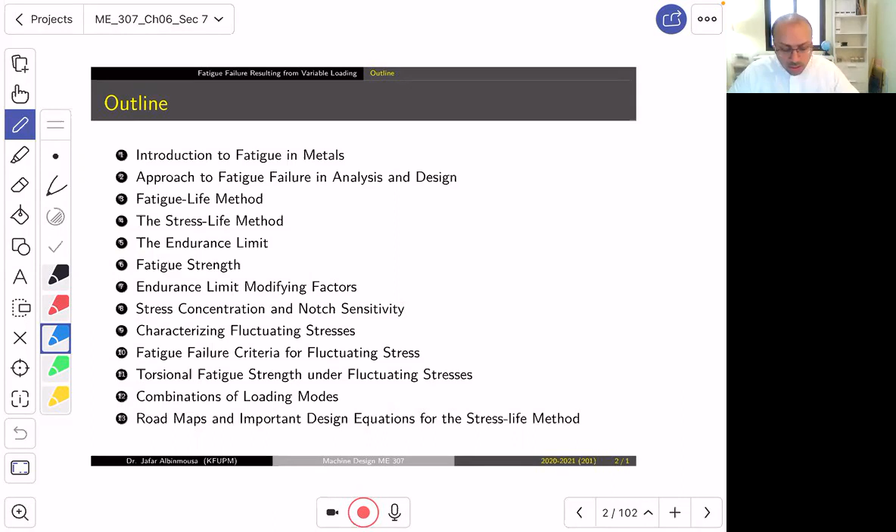So we'll talk about the introduction to fatigue, then approaches to fatigue, then the fatigue life methods: stress life, endurance limit, fatigue strength, endurance limit modifying factors — a very long list, but hopefully it will become clearer as we move further, inshallah.

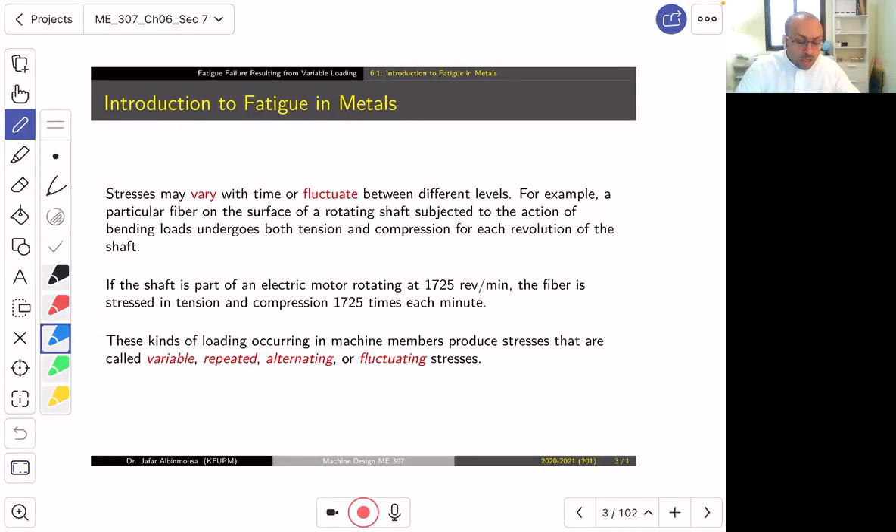Ya shabab, the fluctuation of stresses, the variation of stresses or loads with respect to time, we always tend to make it easy for ourselves and represent it by a sinusoidal wave, meaning the force is changing with respect to time. But in reality, it may hardly follow a sinusoidal wave.

What we understand is that today, ya shabab, with the Arduino age, you can easily connect a sensor to your computer. If that sensor can detect the magnitude of, let's say, displacement or something, and you stick it to your car's suspension arm or any other place, then drive your car, you will just get something like this.

What is this doing, ya shabab? Very simple. If we take the string for the cloth, which is famously metal here in Saudi Arabia, and you cut it from this piece to this, you end up having this nice straight piece. You give it to anybody, even a kid, and tell him, break it. The word break it indicates that you want to have this broken into two pieces. That's what break it means.

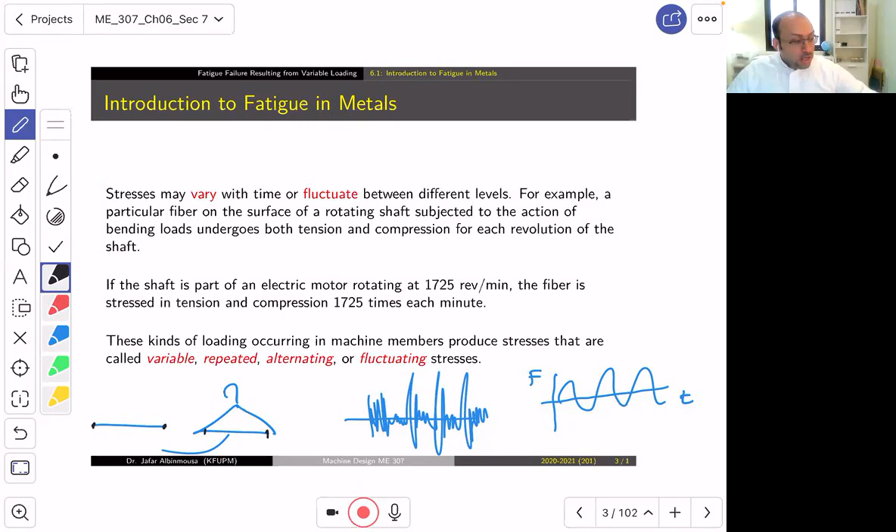So people will try to bend it. They will see that, oh my God, I can't do anything to this. And then probably the tendency, something we develop as humans, is that we will tend to move around until we determine there is a weak point in the lateral direction. But when you bend it, it doesn't break into two halves. So naturally, you will try to bend it back and forth, back and forth. If you do this at home, if you never did it, you have to be very careful, because back and forth will make the middle joint, which is now being bent back and forth, very, very hot, especially if you continue doing this a lot. Now, at a point of time, it will break.

The failure, because you were bending it up and down, is called fatigue failure. The word fatigue came to distinguish it from other types of failure.

Is there any other type of failure? Of course. You can take the same string and hang it on a machine, and then tell the machine, move apart 100 meters per second. And then in a flash, you will hear a sound, tap, and then it's broken. That's called impact. It's a dynamic load. It's too fast, too fast. And of course, there is the quasi-static or static loading, where we take the string and apply load gradually until it breaks. That's a static loading. There is also creep failure, and so on.

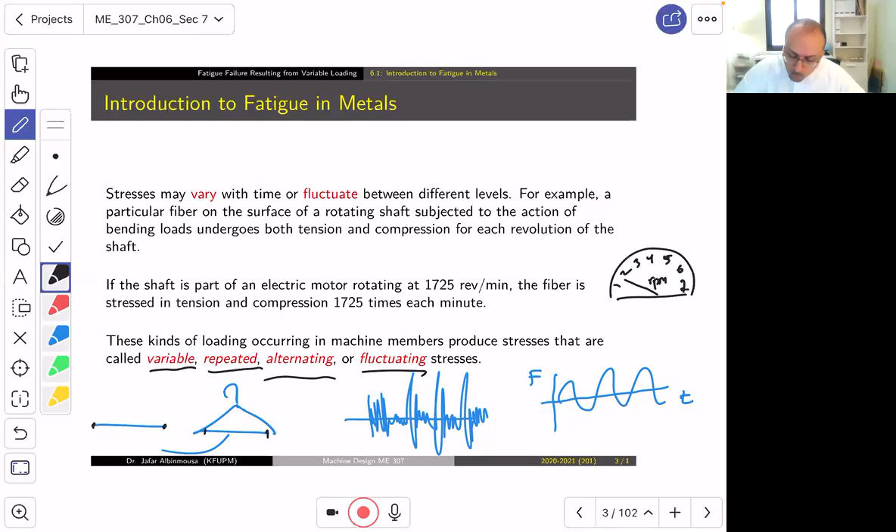But just to give you an example, the speedometer, ya shabab, in your car, you have one which measures the speed and the other one which measures the RPM. The one which measures the RPM is the interesting one. The one which measures speed is the boring one, it's very boring, 100, 200, whatever. But this one is measured in RPM. If you keep your eyes on it and think about it for 1 second, when you are at 4 or 5, it means that the crankshaft in the car, where this reciprocating motion of the pistons inside the engine chamber blow and move up and down and do all the motion, is doing this 4,000 times per minute. That's 4,000. 7 means 7,000, which means this guy is rotating several thousand times in a minute.

And you go to your friend or someone who has a car they bought like 20 years ago, and you ask them, did this fail? Did this crank fail? Because by now they've probably burned through several, maybe 100 million cycles. Is that possible? While the clothes hanger, maybe 70, 60 cycles and it's over.

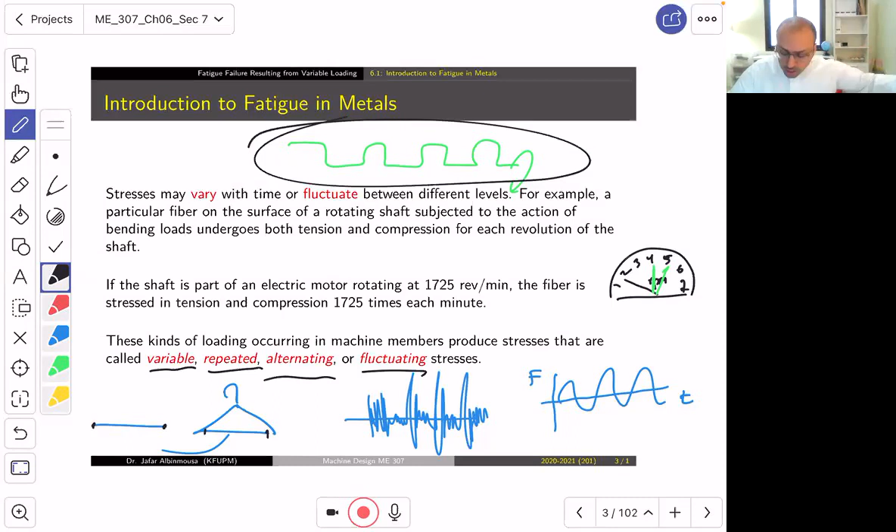And why don't they heat up? The clothes hanger, be careful, it can burn you, and it will burn you really, really hard, because its temperature reaches a very, very high range. We will talk about all of this later. These are just questions to stimulate your thinking.

Now, so machines, we are mechanical engineers. Now, maybe when we did CE203, ya shabab, and when we did all of what we did before in chapters 3, 4, and 5, it looks like we are dealing with static failure, okay? But we are mechanical engineers. We make machines, and most of our machines move. Once they move, there is cycling.

Do you know, shabab, the fact that you eat induces cyclic loading on your teeth. The fact that you walk, a human being can have around several, maybe 2-something million cycles a year, I don't remember the exact numbers, I can bring them up for you. Cyclic loading is everywhere. Because your heart is beating, there is cyclic loading. Everywhere there is cyclic loading. So fatigue is very important, especially for us.

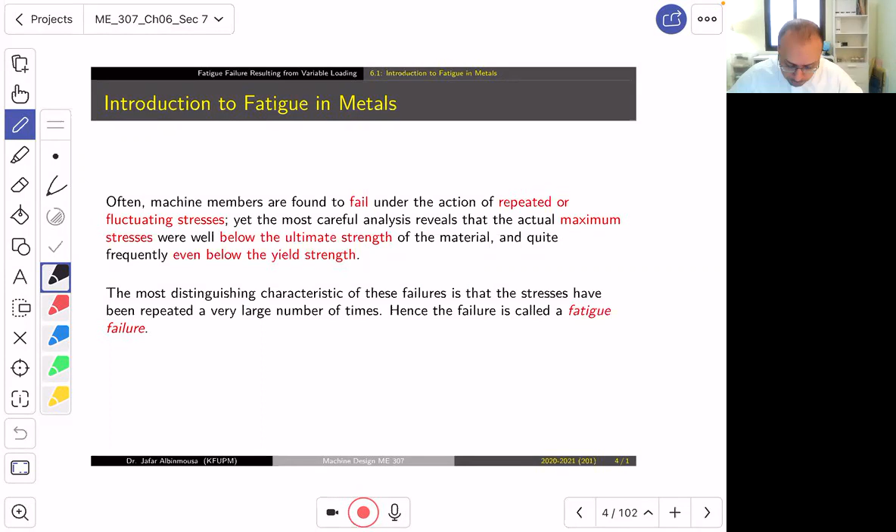So what happened? The problem is this. I want you to look down at your screen and look at this one. This is the problem. The problem is that fatigue gives you no warning.

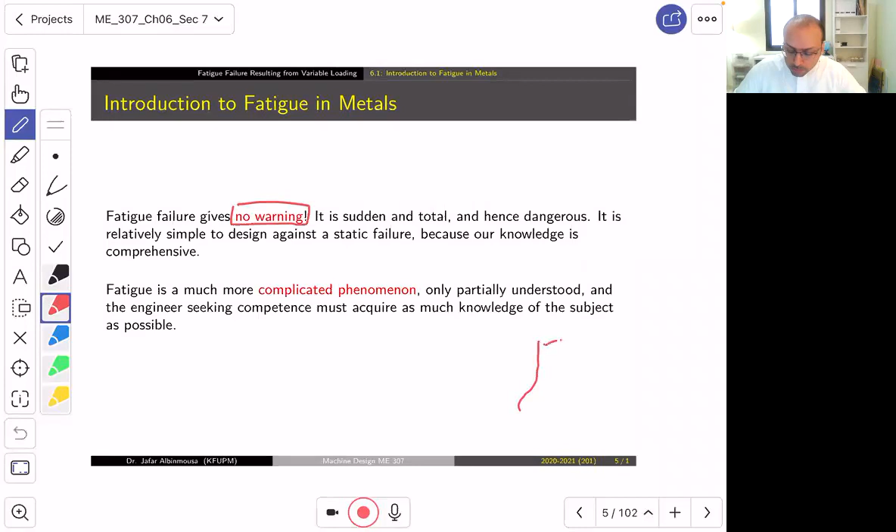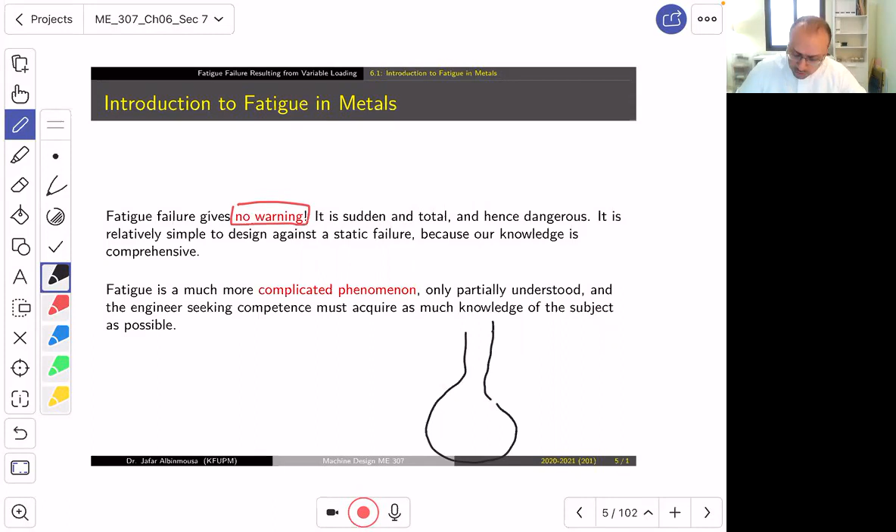So if we think about a connecting rod like this—or actually let me show you, I was planning to plot something else. The connecting rod usually has a circle and a wheel-like shape. So what happened is that usually there's a very little tiny point.

This tiny point could be due to a micro defect or a little tiny porosity. And then what happened around the porosity? The stress will be high, and maybe the stress at this point will reach above yielding, although the stress at all other points is elastic. But at that point, because of the stress concentration, it might be micro or even nanoplasticity.

That little thing will start growing a crack that nobody can see. Maybe you need a scanning electron microscope to see it. But over 15 years, your dad was just growing that crack like a baby, feeding it every day, cycles after cycles after cycles.

And the interesting thing about fatigue, guys, is that the crack will just grow like this—no ductile behavior, nothing, no signs, no necking, no chips, nothing. I mean, if you look at the rod, you may not even be able to see the crack. Maybe if you're very strong and you bend it, you can see it opening up, but because the entire material is elastic, it will close it.

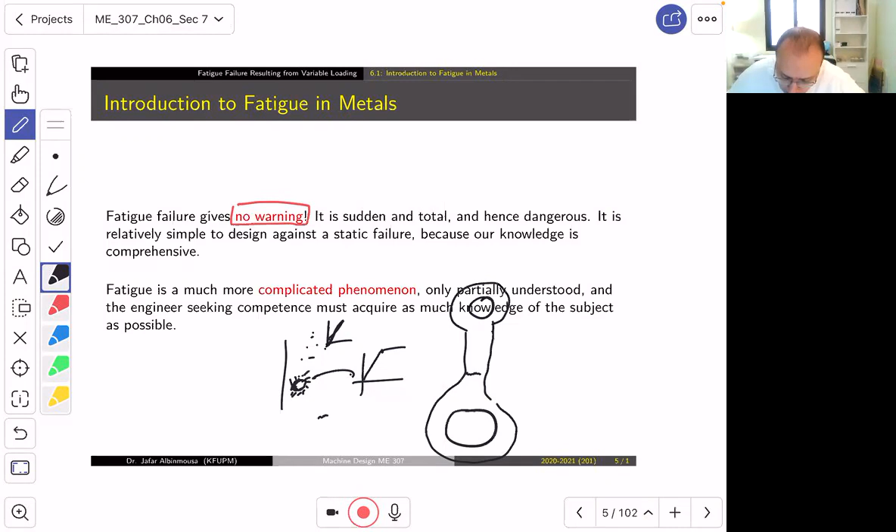So then what happened? There was only a little tiny bit left, and you finished it. Because you are rough? No, probably. But your roughness just killed the last year or so—you accelerated it. Maybe your father would have had one extra year, and you came along and reduced it to a month. Maybe. But he was doing the entire work—he spent 15 years, millions of cycles, growing that crack.

Of course, this is not to say that your father is guilty. What I'm saying is that the machine always has defects, and this is why the crack was going to grow no matter what. This is why some cars ultimately fail and others don't—maybe they are really designed well to survive a trillion or a billion cycles, I don't know, and this is way beyond the lifetime of a human being. That's the reason it's sudden and total, and very dangerous.

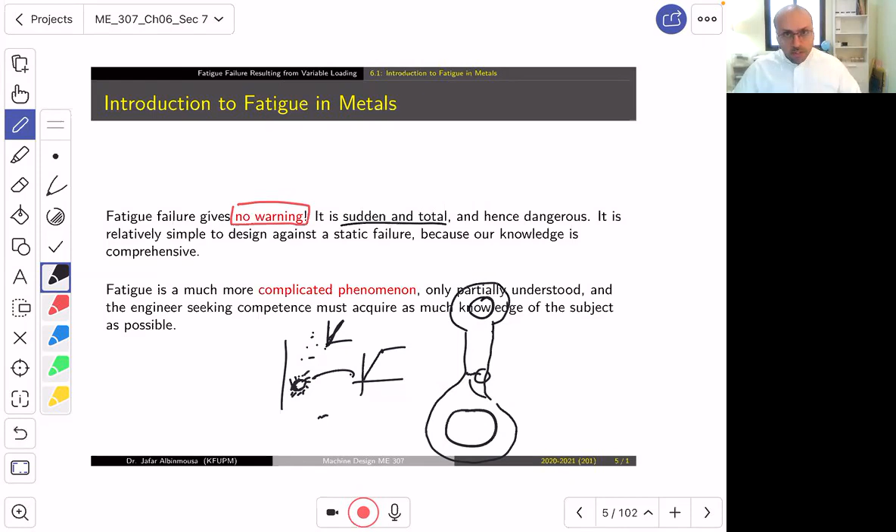It fails just like that, and it's very complex. Why? Because the material is ductile, it's steel, but it fails like it's brittle. Very strange—you see a crack growing.

Let me show you, I think I have some pictures. Let me try to show them to you. No, I don't—that's very strange. Maybe I'll show them to you later. But what happened is that a ductile material failed like a brittle material. It's just very strange. So what happened?

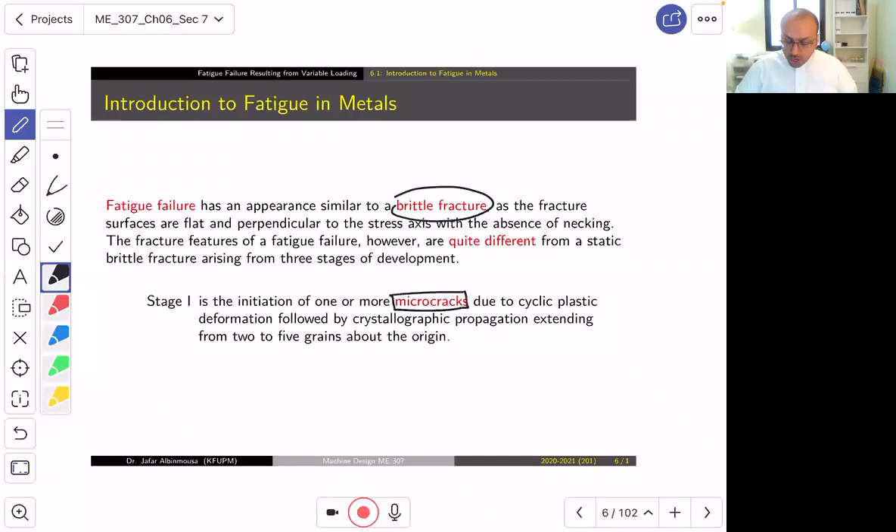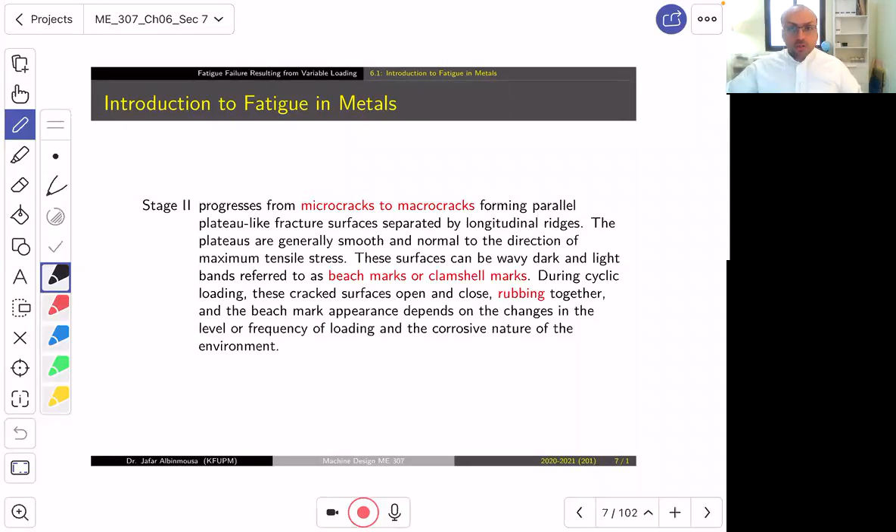Usually fatigue has multiple stages. The first one we call the micro crack stage, where cracks start from a very tiny dislocation, microvoid, or discontinuity. This micro crack then grows into a macro crack. Now the last stage, the final one, is where fatigue has eaten up 70% of the cross section—the cross section is basically gone, nothing left.

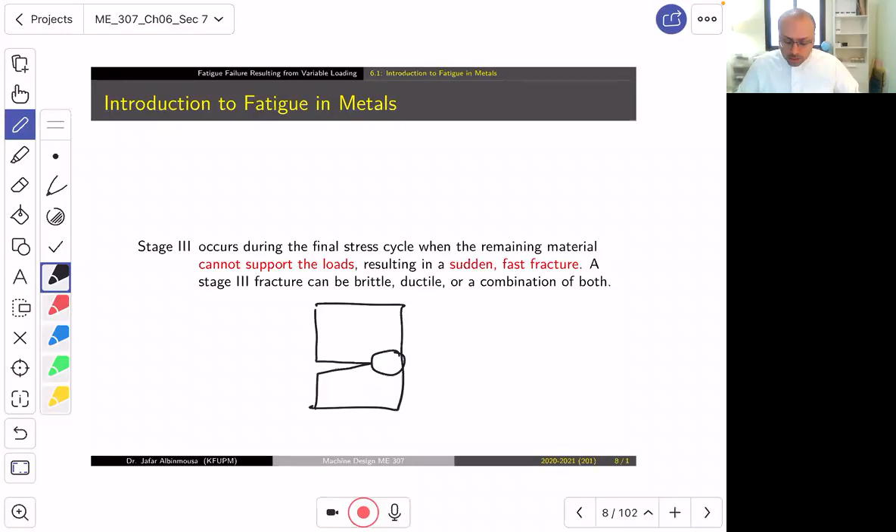So if you think about a cross section like this with a crack, this is the only remaining part in the cross section. That's it—this can happen with just one single load, because the area here has become so small. You're no longer dividing the force over the original area, you're dividing it over this small remaining area. So one single force while you're cycling up and down breaks it.

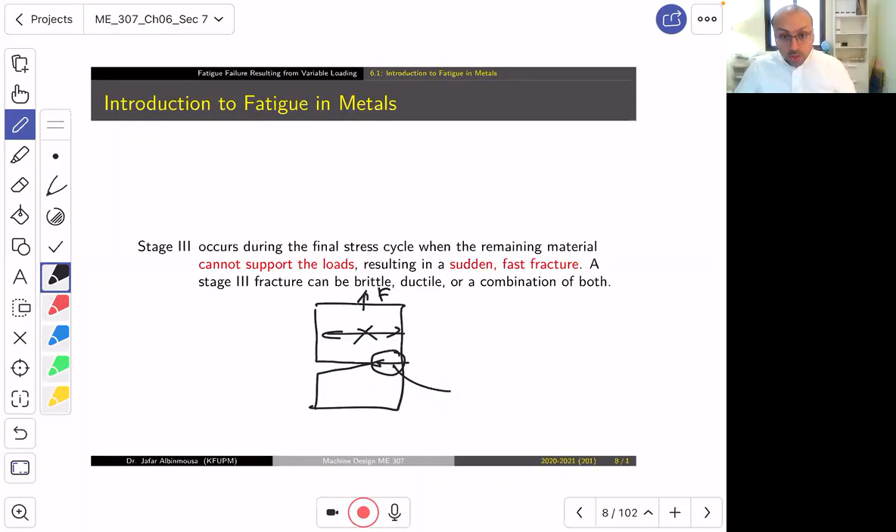What happened is that when the material breaks, the surface of it, as you're cracking it, becomes rough. But when you close the crack, these asperities, these little rough bits, smash into each other and become smooth. And then you grow the crack further.

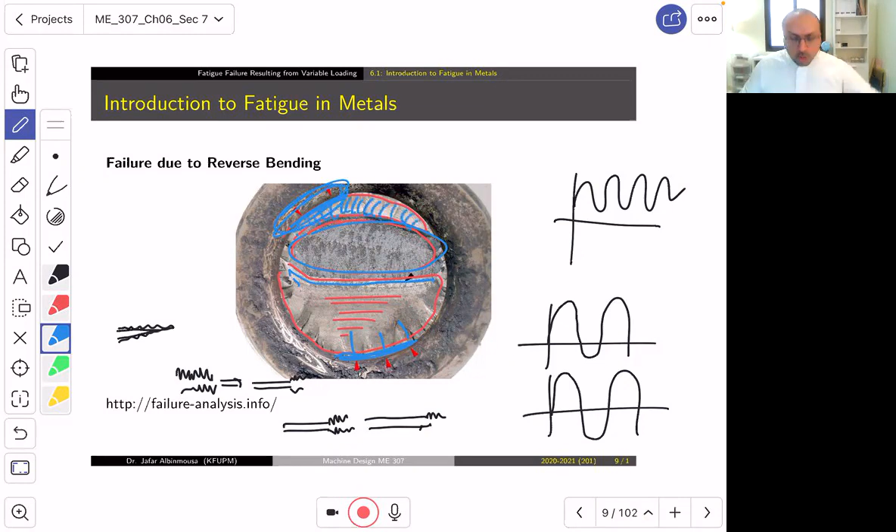Two regions, and it began to grow. Apparently, from my understanding, the crack started on this side earlier, maybe after one year, while this one started after about 4 years. So during those 4 years it grew until it reached here. After 4 years a new crack started and began to grow right here. So both of them joined forces, but one made a bigger area than the other.

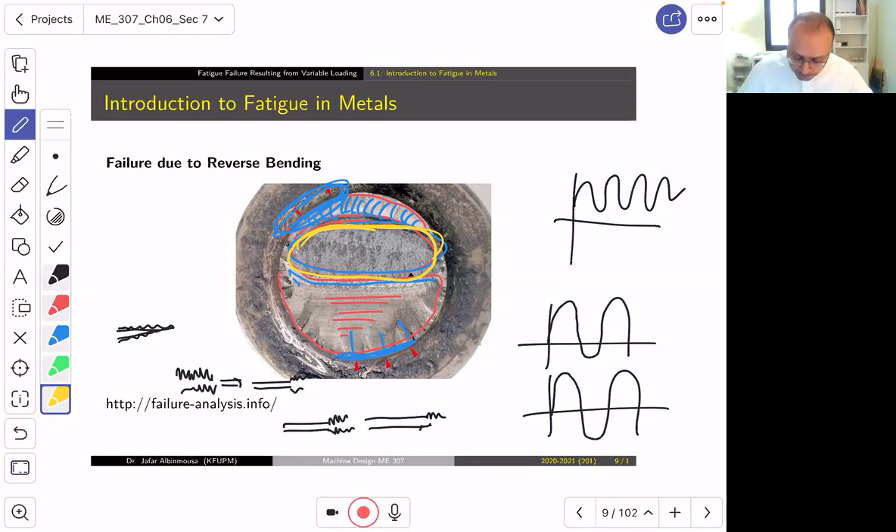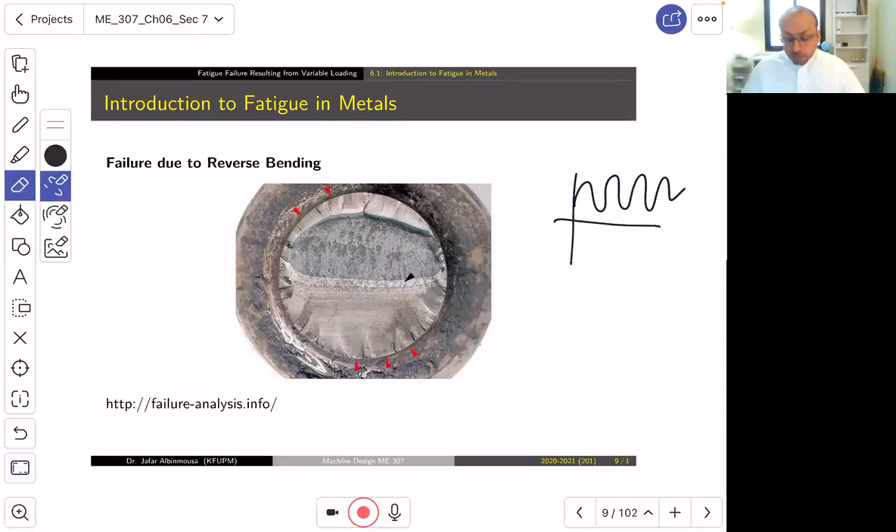And by looking at the area, for example, let's assume, God forbid, this part is from an airplane. Let's see now how you become an investigator. You become a forensic investigator. This is an airplane, let's assume it belongs to an airline, AMM airline. I'm just making this up.

Okay, these airlines, supposedly every 5000 hours, every 10,000 hours, or every 100 flights or something, need to inspect certain parts in the airplane. Now, when they inspect, they use X-ray and other technologies to scan this part. Logically, when they see a tiny crack, they will know if it is too much or too little, and then they will decide to replace the part.

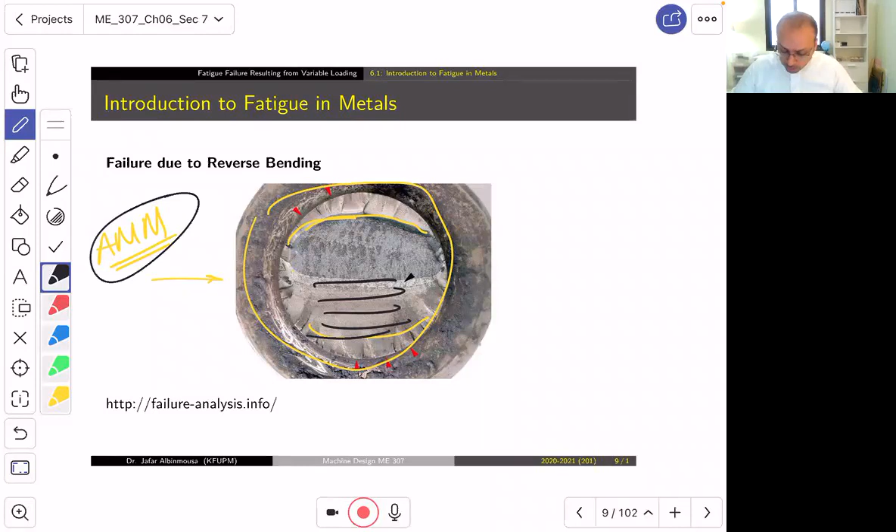This is it. This is how important fatigue is. If we look under the microscope, we will see what I told you. We will see what is known as fatigue striations.

Those are the lines. You see, each line represents a growth of the crack by one little increment. We can even calculate the number of cycles from this. There are methods to know from this how many cycles the crack was growing.

By the way, this is one single grain, just one single grain, this one. And the crack is moving through it, 1, 2, 3, 4. How many? Per day, per year. And this one is a fractured part. This is the other, I think adjacent grain, which is fractured.

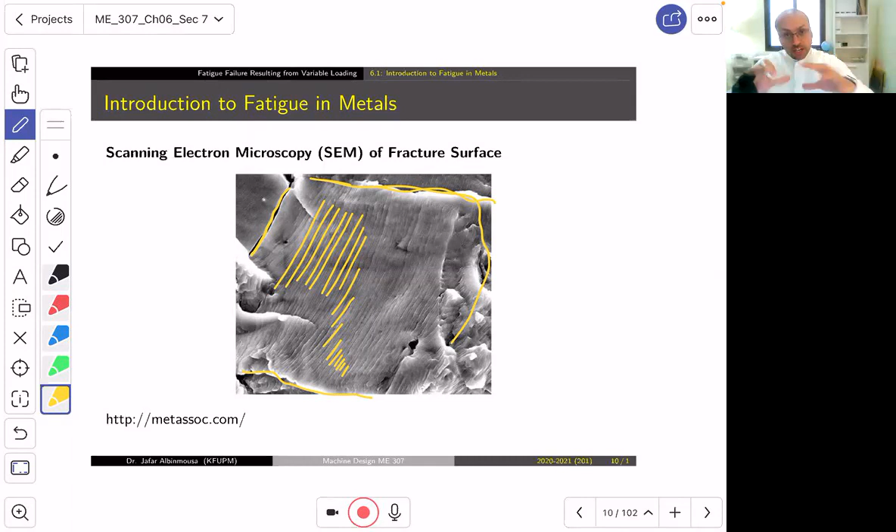This map of the crack area, how it shows up, can be understood from the geometry. Look at the geometry and the loading. So if you know that, if you see something like this, it's because there is stress concentration. If you have a V notch like this, you should expect the topography, or morphology of the surface, to become different depending on the surface itself.

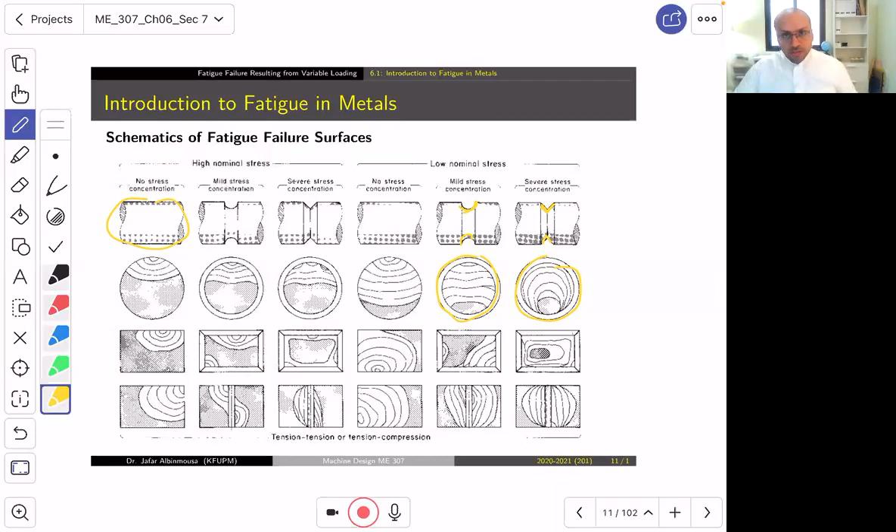So you would know the story. You can tell the story based on the surface, based on the loading, based on the geometry. You will see different lines marked in the specimen after its failure. Those are too many examples showing you how to determine even if it is shear fracture or shear fatigue, or if there is a mean stress, or eccentric loading, all just by looking under the microscope.

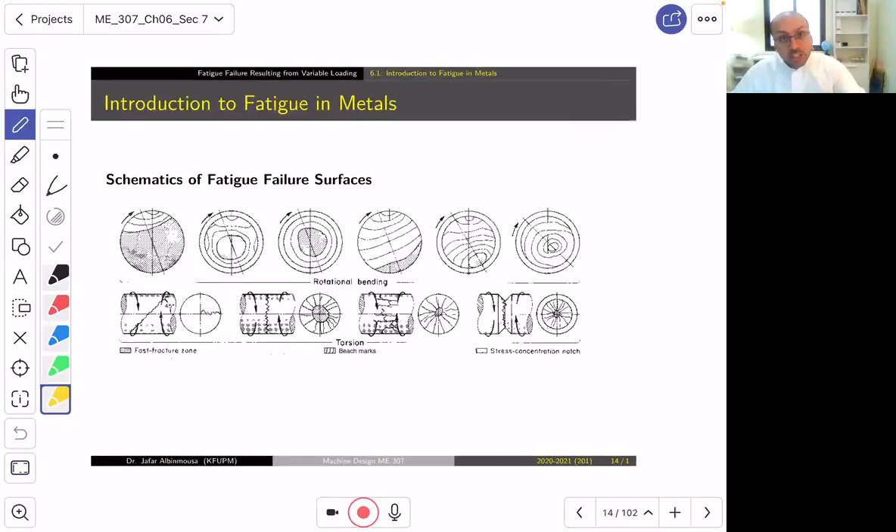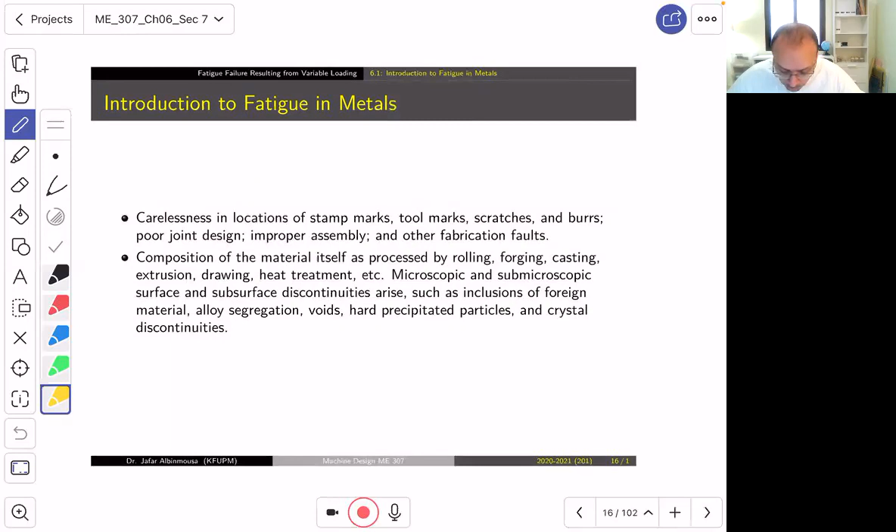Okay, this is just for you to know the whole thing. So what is important is that the slides I went over are just a textual explanation of what I was talking to you about. So how do we analyze fatigue? There are several methods. The first method is called... let me check, how much time do we have now?